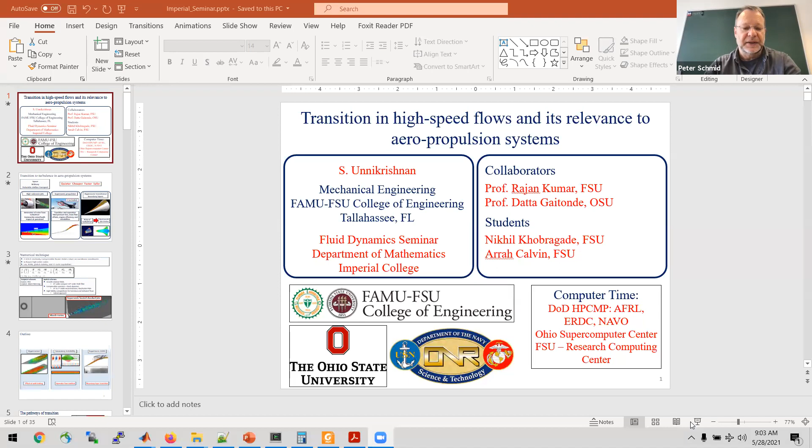I'm just trying to share the screen here. All right. And presentation mode. Yep, perfect. Okay.

Thank you, Professor Schmid, for that intro. I'm Unni, I'm a faculty at FSU. Today's talk will be on transition in high-speed flows and its relevance to aero-propulsion systems.

Let me start by first thanking you guys for the invitation, and it's a great pleasure to share some of our recent research with this community. I would like to acknowledge our collaborators on these projects: Professor Rajan Kumar here at Florida State University, Professor Datta Gaitonde at Ohio State, and our students who have contributed to this work, Nikhil and Arrah at FSU. We'd also like to thank continuing support from the Office of Naval Research. They have been supporting this research at these institutions, and we of course need lots and lots of computing time, which has been provided by various agencies within the DoD, the Ohio Supercomputer Center, and the FSU Research Computing Center.

With that, let's talk about some motivational charts here. Why do we need to understand transition to turbulence, especially in high-speed flows? Because whether you think about space applications, military, or futuristic civilian transport, high-speed air travel is dependent on reliable prediction of skin friction, heat transfer rates, and reliable predictions of boundary layer performance within internal flow paths. There are a lot of applications where transition to turbulence comes into the picture in such systems.

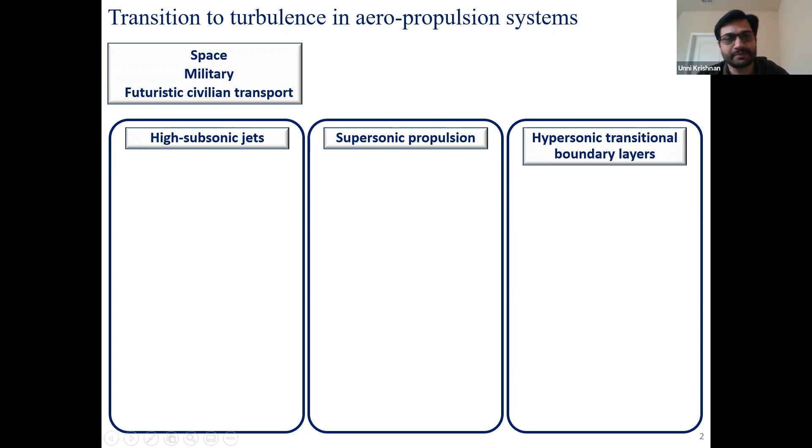I have listed three specific examples here because we have been working in these areas over the past few years. The first one is high-speed subsonic jets. Civilian aircraft as well as military aircraft can have high subsonic or even supersonic exit jets that throw out a lot of kinetic energy into the ambient. So all this shear layer harbors a lot of instabilities, and the turbulence generated from it can result in aeroacoustic production of noise, which has very damaging effects on personnel as well as environment. We need to understand, from a first principles approach, how these turbulent eddies or instabilities generate the perceived sound in such turbulent flows, in order to control them eventually.

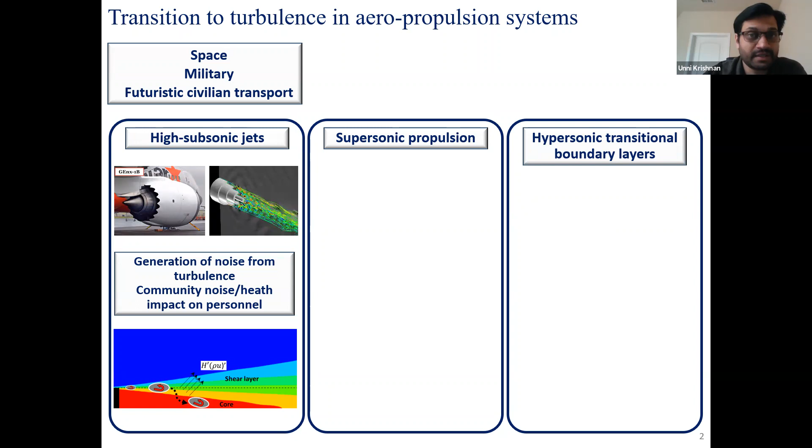The second application I have noted here is the inlet of a supersonic aircraft. Here, issues include things like separation, total pressure loss, mass flow deficits, and its impact on engine efficiency and shock train instability. For example, if you have excessive oscillations in the compression system, you could have unstart, which can damage the aircraft. So again, we need to have a very thorough understanding of how the boundary layer develops on these compression systems or inlet systems for reliable designs.

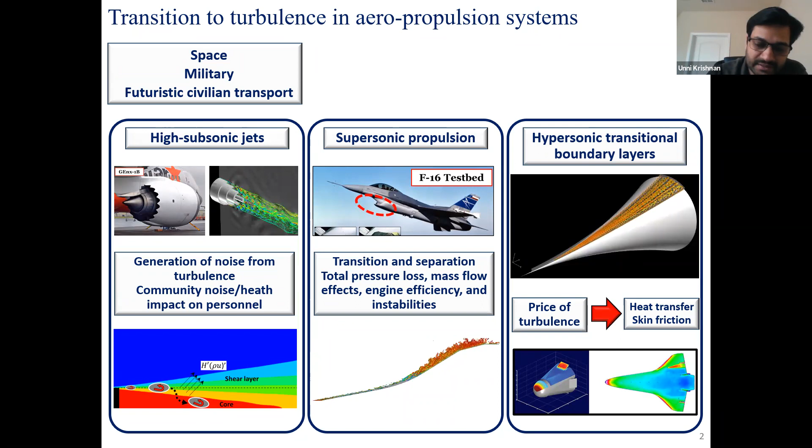The final application is hypersonics. The key here is sustained hypersonic flight. If we are to design sustained flight vehicles traveling at Mach 6, for example, we need to have control over where transition may occur, or if it even occurs, and whether we can control it or push its location downstream over the aerodynamic surfaces, in order to control the price we pay for enhanced wall loading. All these applications can be summarized in a few words: we need to make our high-speed systems quieter, cheaper, faster, and safer. That is why we do what we do.

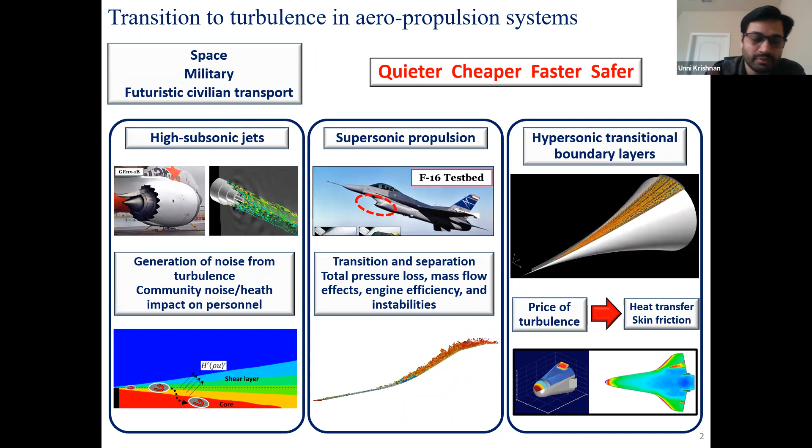With that, let's go into the technical component of the talk. Before I present some results, a brief introduction on the tools we are using. Ours is primarily a computational analysis group where we rely on high fidelity simulations to probe these flow systems. Typically, we use two-dimensional or three-dimensional simulations of unsteady compressible Navier-Stokes equations. These solvers implement the strong conservation form on curvilinear coordinates so that we can handle complex geometries. The in-house code has high order capabilities and variants like LES, RANS, stability tools, and the FT suite, which is essentially a specific class of modal decompositions that can handle compressible flows.

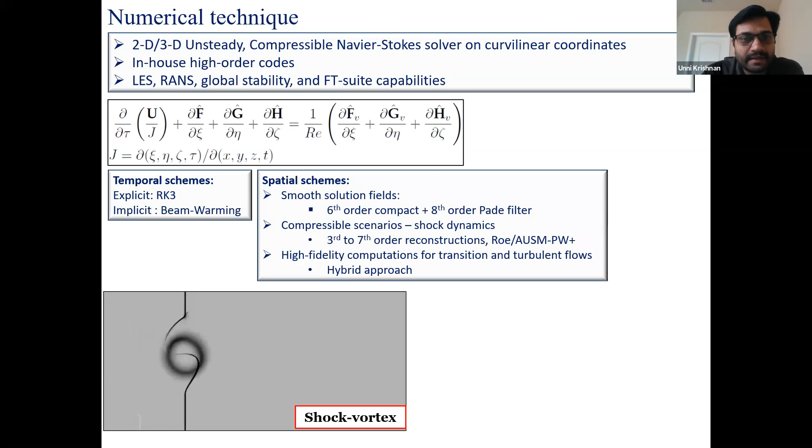In such scenarios, we can use Riemann solvers or a hybrid approach which combines both these. So these are some basic information on the tools that are going to be used in this analysis.

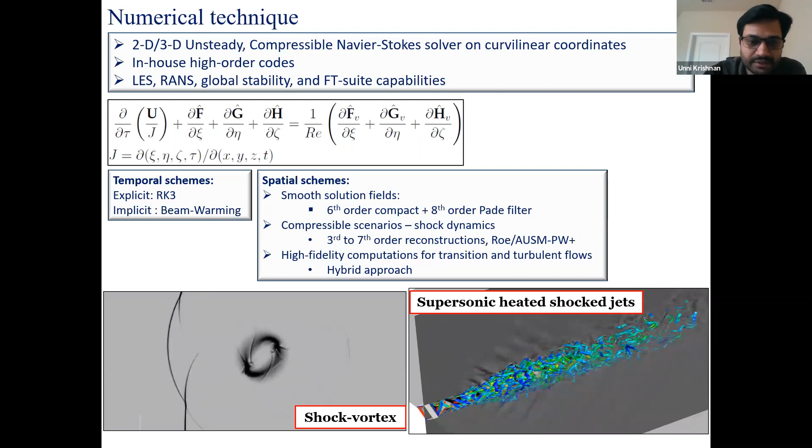Going ahead, as we discussed in the abstract, we have three components in today's seminar. We'll first start with hypersonics, and what we are going to address there is the effect of wall thermal conditions on a very key instability mode in hypersonic boundary layers. As you cool the wall, for example, the qualitative nature of instability response in the boundary layer changes, and that's what we are going to quantify today. And we will look at some nonlinear stages in that instability evolution.

The second part transitions into a talk about an operator-free method, which can be used to study secondary instabilities in such non-linearly distorted flow fields. This is a matrix-free or operator-free method that can be easily implemented in existing Navier-Stokes solvers, and we will look at certain secondary instability characteristics of Mach mode instability.

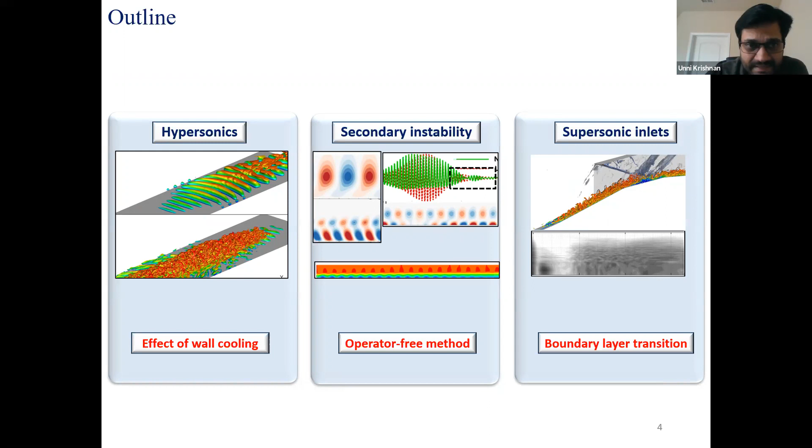Finally, we will conclude with an application of the stability tools and transition analysis in an aero-propulsion problem. Specifically, we will look at a supersonic inlet and see how we can get more physics into this complex flow field by adopting a very fundamental stability-based analysis. So with that, let's go into the first section.

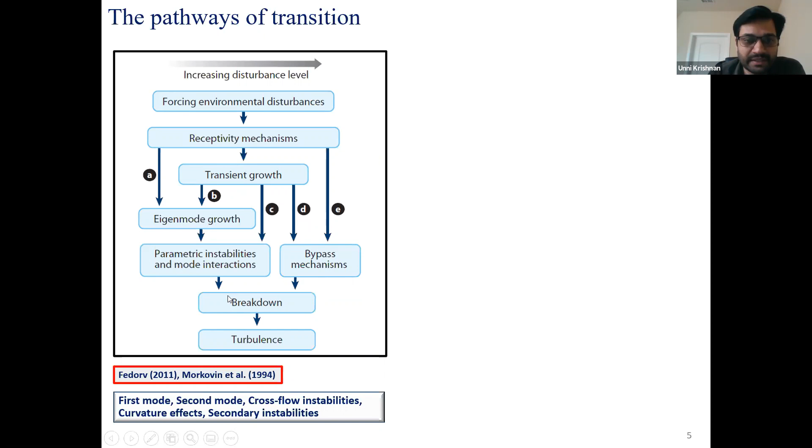If you look at the literature, there's this famous diagram from Morkovin. Transition in high-speed boundary layers, for example, can progress through various different pathways depending on free stream conditions. It starts with receptivity, and it could follow the linear eigenmode growth or a non-modal or algebraic growth, eventually reaching nonlinear saturation and breakdown. Sometimes if the free stream conditions are high intensity, you could also get this bypass mechanism, which circumvents all this modal growth. At the end of the day, you get some sort of a saturated flow, and then it breaks down into turbulence. In order to focus on hypersonic boundary layers, that's the topic we are going to discuss today.

Now the problem is, even if the boundary layer survives this linear growth, if you look at the growth rates of the second curve, it's an order of magnitude higher than what it experienced in the first curve. So the second curve is literally called the second mode, or the Mack mode. Mack mode has a higher growth rate, and hence, of course, it has a higher chance to reach that critical amplitude to trip the boundary layer.

Theoretical analysis have shown that you can have many such curves which appear in the downstream direction in high-speed boundary layers, which correspond to inviscid instabilities of the mean flow. So this is the mode we are going to focus on today, the second mode, or the so-called Mack mode.

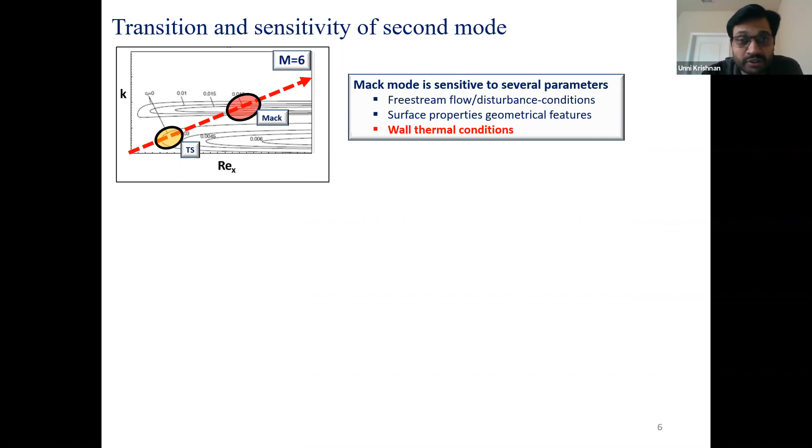When I say wall thermal conditions, what I mean is Mack mode in the boundary layer can evolve differently depending on whether it is an adiabatic wall, a hot wall, or a cold wall. And cold wall is going to be, again, the focus of the discussion here.

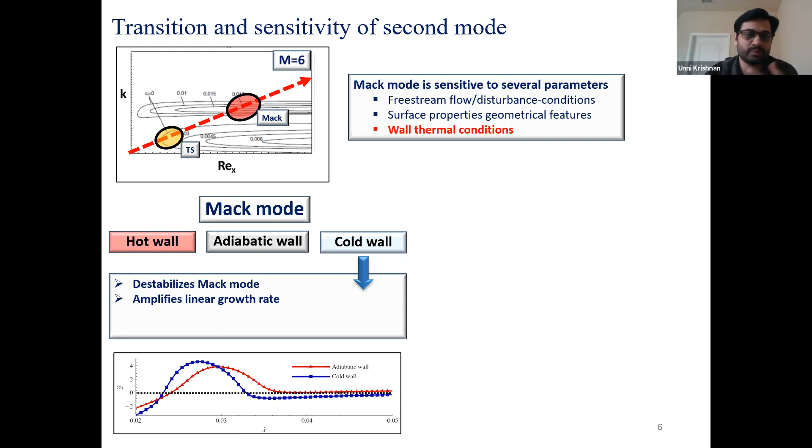The first basic observation is linear stability has shown that if you cool the wall, the Mack mode destabilizes, whereas the first mode shows a reduction in its growth rate. What I'm showing here is the complex part of the frequency omega i, that's the growth rate, from a simple 1D LST or linear stability analysis. The red curve is an adiabatic wall and the blue one is a cold wall. As you can see, the growth rates have amplified when you cool the wall and the wavelengths have decreased, so the length scales shrink and amplification rate increases. That's what typically happens when you cool the wall.

So why do we even need to study cold wall trends in hypersonic boundary layers? This is because in ground tests, where high enthalpy tunnels are used for short duration runs, the thermal inertia of the body may not actually allow it to heat up or warm up to that recovery or adiabatic temperature, which is more likely the scenario in actual flight. So it's important to reconcile the differences between such cold wall conditions versus an in-flight condition, in order to draw reliable, high fidelity insights from our elaborate experiments and computations. That's why such cold wall simulations are very important and practical for hypersonic studies.

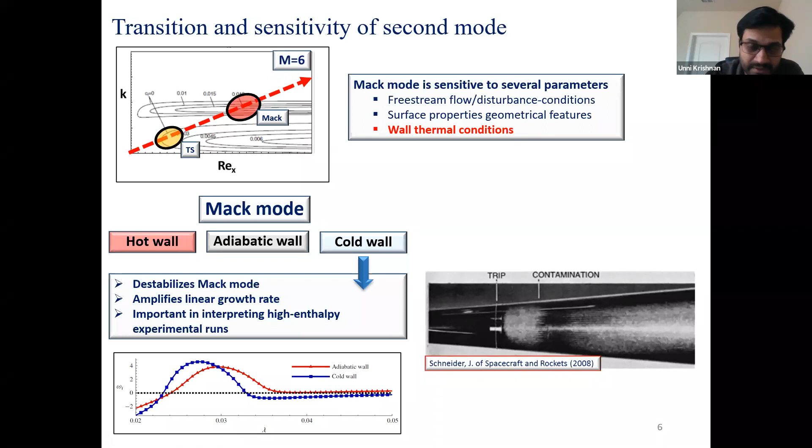1D LST is basically a one-dimensional analysis. It will tell us what qualitative changes we can expect in the instability mode, so this is the first level of probing we use to categorize what instabilities can occur in a boundary layer as we cool it. The next phase includes two-dimensional DNS, where we probe into the spatial structure of these instabilities in greater detail. Finally, we do 3D DNS for select cases because it's expensive, but it gives us insights into possible transition, nonlinear scenarios, and three-dimensional effects that are more commonly seen in realistic experiments or flight simulations where you have wave packet forcing in the boundary layer. So these are the different tools we are going to use for our study.

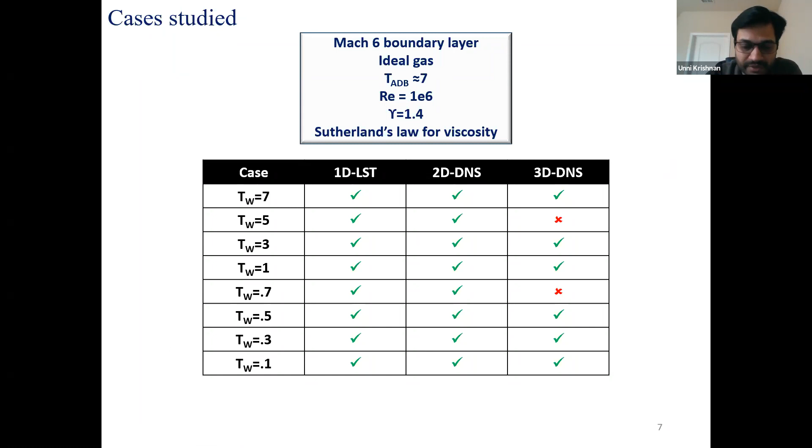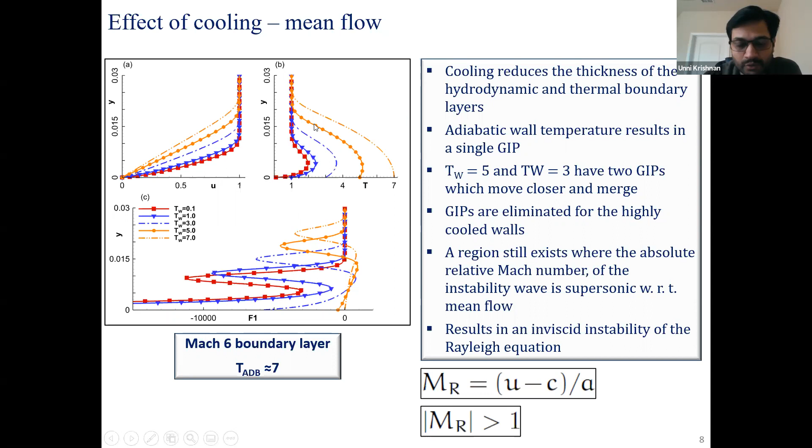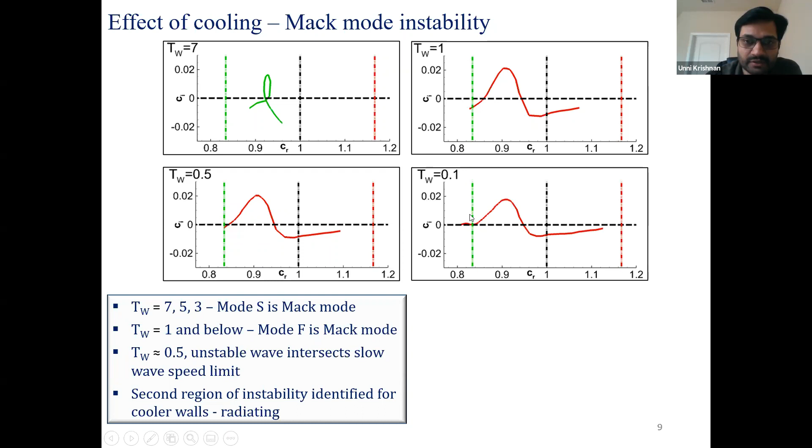And if you closely look at the eigenmode which emerges from that U minus A limit, there is a second zone of instability here. In literature, this is known as a supersonic mode because it is traveling at a phase speed less than the slow acoustic wave, that's less than U minus A.

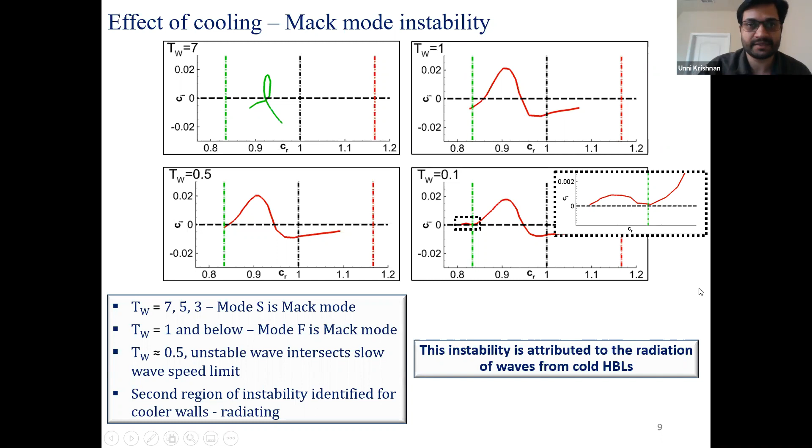And when you have a near stable or an unstable wave at very low phase speeds like this, it leads to radiation from the boundary layer. Physically, what happens is that if you just keep transmitting waves to the boundary layer and keep cooling the surface, at some threshold you are going to see emissions from, or radiation coming out of, the boundary layer because of this wave speed limit. So that is interesting physics we are going to look at here.

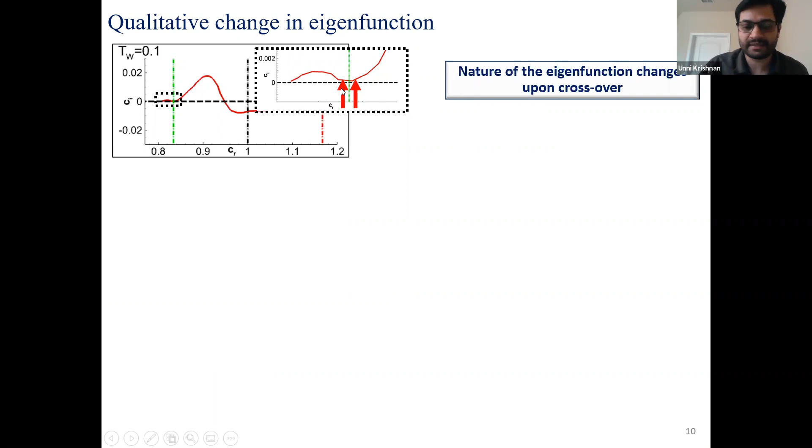So of course, the wave speed limit is also associated with a qualitative change in the eigenfunction itself. What I'm going to show here is how that eigenfunction changes, this is all from simple 1D LST, prior to that crossover and immediately after that crossover. So this shows the vorticity and acoustic component in the instability just before it intersects that wave limit. It's as expected, you have a very nice compact wall normal support to that instability wave.

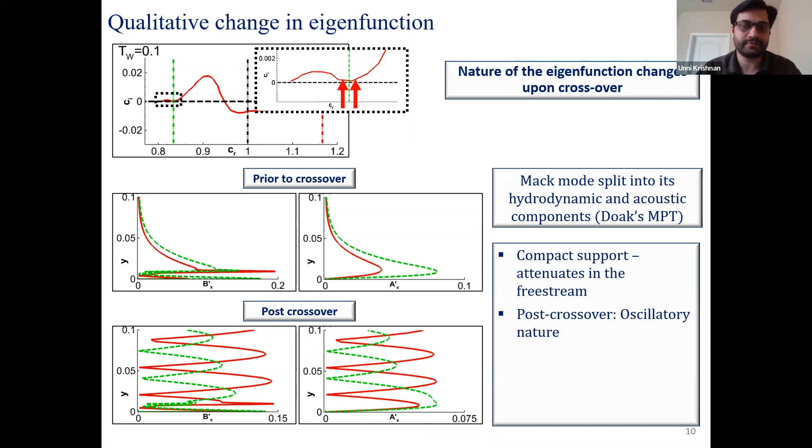But the moment it crosses over into the slower wave phase speed limits, it suddenly changes its character. What comes out of that limit is a highly oscillatory function. That means it's no longer compact, and it's going to throw out energy from the boundary layer into the free stream. That is some nice observation we have using simple 1D LST.

And an important observation here is it is not just sound waves that come out of the eigenfunction. It's actually even throwing out vorticity into the free stream. So it is radiating out acoustic energy and vortical energy into the free stream from the hypersonic boundary layer.

People who do research in hypersonic transition, the first question they ask is, well, we have a mechanism that naturally throws out energy from the boundary layer, can we use it to mitigate transition? So the question is, if we can say that cooling the wall causes the boundary layer to throw out energy, can we use it to control transition? Well, it's an option worth pursuing, right?

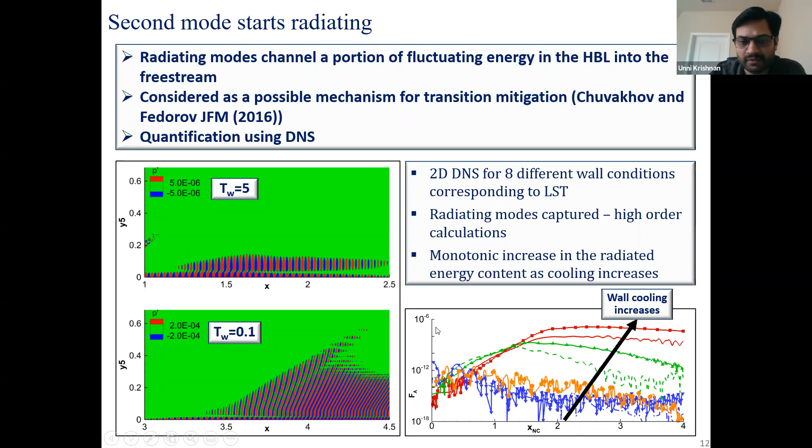So the first step is to quantify that energy, what's coming out of the boundary layer as we cool it. This is basically an energy flux integrated at a given wall normal distance in the flow, in the domain. Outside the boundary layer, you can see that as we cool the wall, these are different wall temperatures, it monotonically increases. There is around an 8th order of magnitude increase in the energy flux coming out of the boundary layer as we cool the wall.

So now the question is, what does it imply for wall pressure fluctuations? If it is really helpful, it should probably attenuate wall pressure perturbations, right?

When we look at the wall pressure perturbations, unfortunately we cannot recreate an inverse trend, because as we cool the wall, the competing mechanisms are second mode destabilization and second mode radiation. The radiation is not sufficient to throw out enough energy from the boundary layer to attenuate that instability. So this is the RMS for different wall temperatures.

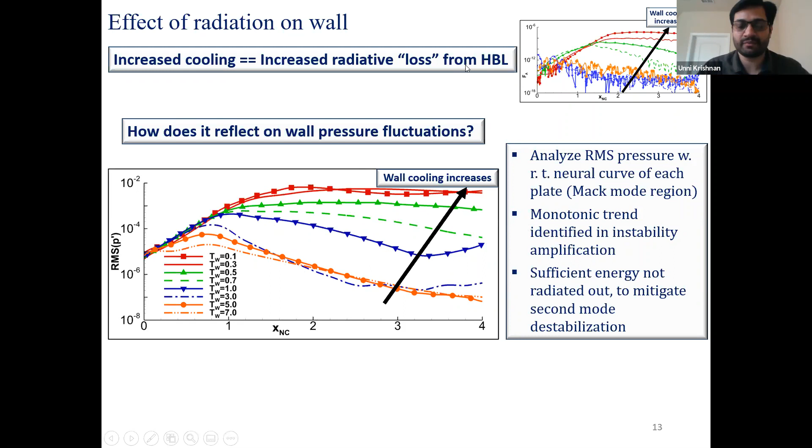So it's not very promising, at least from these 2D simulations. Now what we are going to do is a more realistic 3-dimensional DNS.

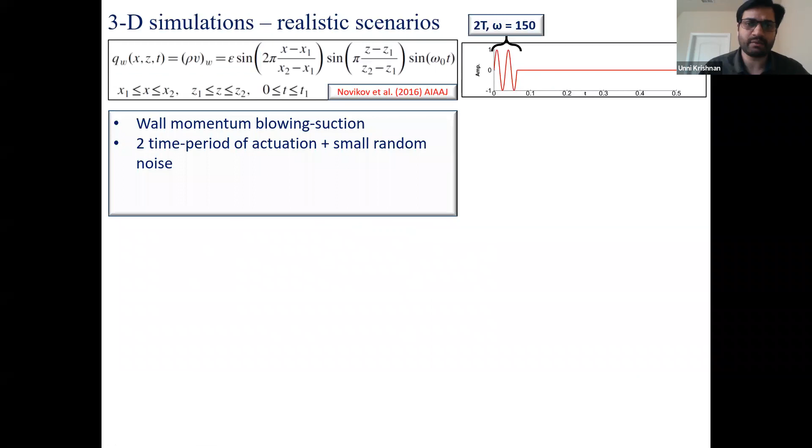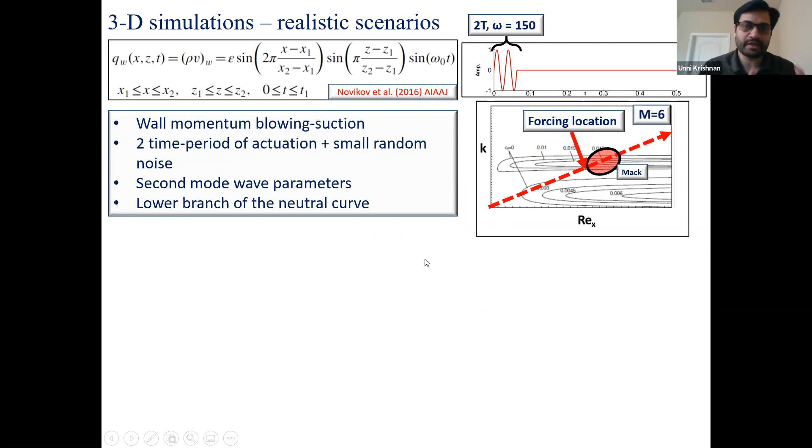Here, what I'm going to show is first we design a wave packet forcing, centered around the most amplified second mode instability depending on our simulation domain. So you put in the wave parameters like frequencies and wave numbers that really capture that wave which transits through that neutral curve, and we compute its evolution through the hypersonic boundary layer.

So it's not helpful, at least in these simulations. We cannot depend on that radiation mechanism as a transition control technique, at least under the given circumstances. So now, well, we couldn't control it, but at least can we quantify what is happening under cold wall scenarios.

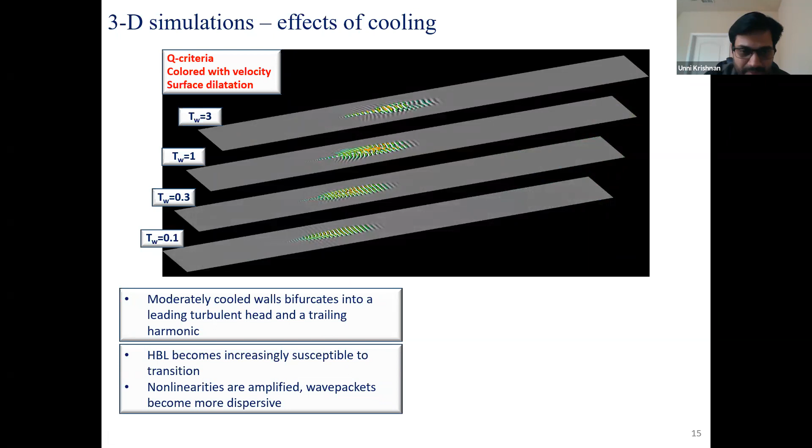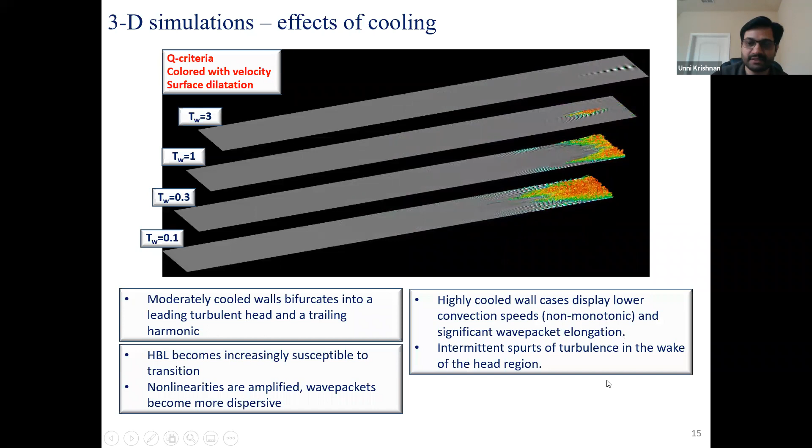But as we decrease the wall temperature, the boundary layer becomes more susceptible to transition. Non-linearity is amplified, the wave packet becomes more dispersed and stretched out, and you get this extremely turbulent spot by the end of the simulation. These are intermittent spurts of turbulence that happen in the wake of the head region.

So there are a lot of qualitative changes that happen in the wave packet propagation depending on the wall thermal conditions. And we need to keep in mind these qualitative differences when we interpolate our low speed experiments or computations and try to make predictions for a real life flight scenario.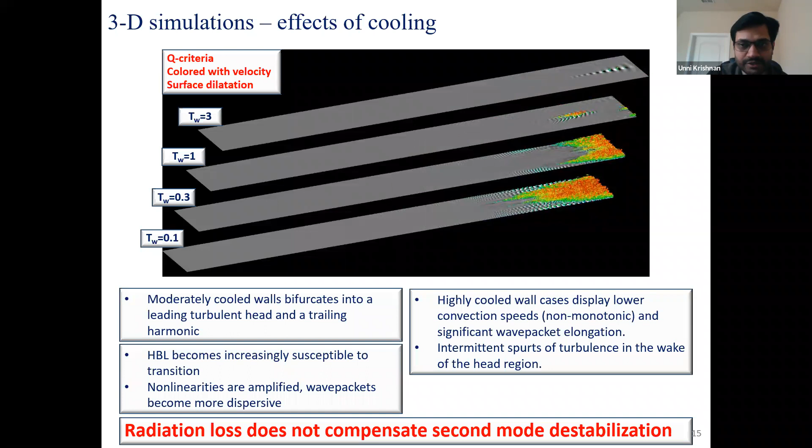So for a designer, the question is, what impact do I have on wall loading characteristics, right? That's what an aerodynamicist should be interested in naturally. So for that, we are going to take a closer look at the turbulent spot structure itself.

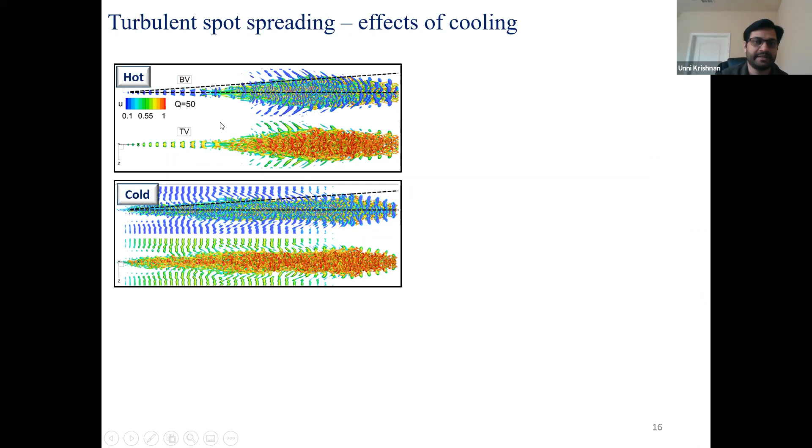This is a top view of the hot and cold wall turbulent spots generated during the simulation. Of course there are obvious differences between these. For example, in the hotter wall we have much broader spots, as opposed to slender and finer scale structures in the cold wall case.

If you look at the spreading angle, it's not very sensitive to wall thermal conditions. That's because we found the spreading angle to be dictated by the boundary layer edge condition, and it matches what experimentalists have found. Around 4 degrees is what comes out for a Mach 6 boundary layer.

Another interesting thing is, can we explain the spreading mechanism in the lateral direction? Because it's also important to quantify how these spots spread in the transverse direction—this is the streamwise, and this is the lateral or spanwise dimension. For that, there was an earlier study by Redford et al. who looked at the so-called lateral jet mechanism.

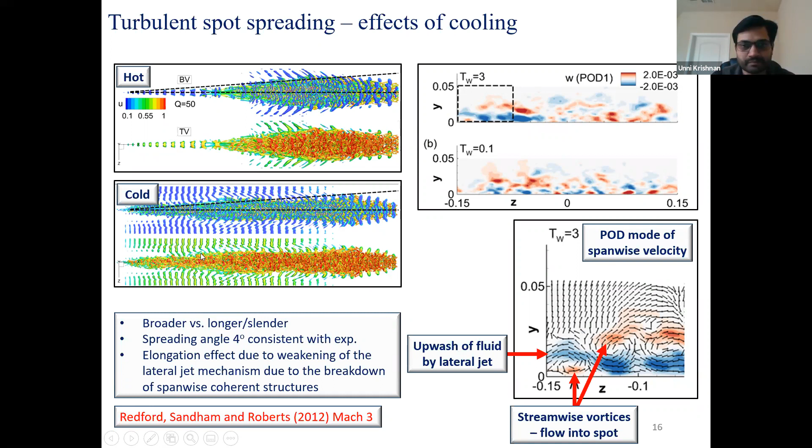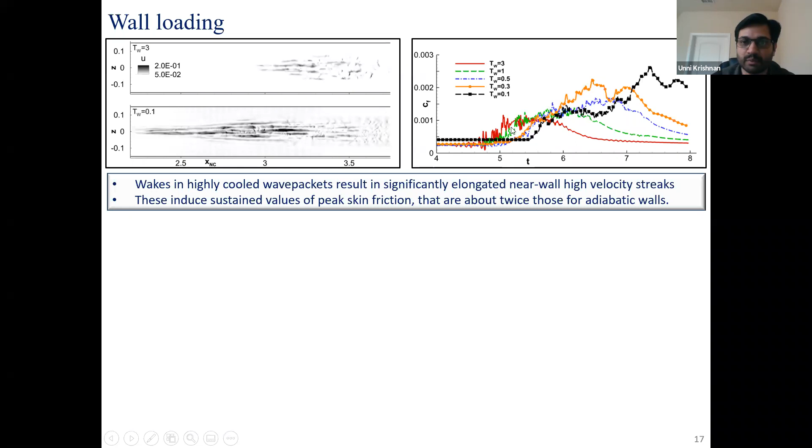But if you look at the cooler walls, you have much sustained levels of higher skin friction being induced on the surface because of this structure. And it's almost twice that of the T wall 3 case for a much cooler wall. So it's a very high impact on wall loading.

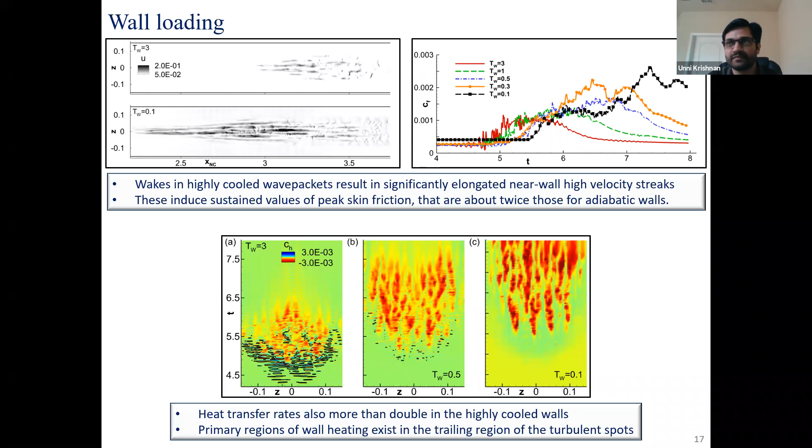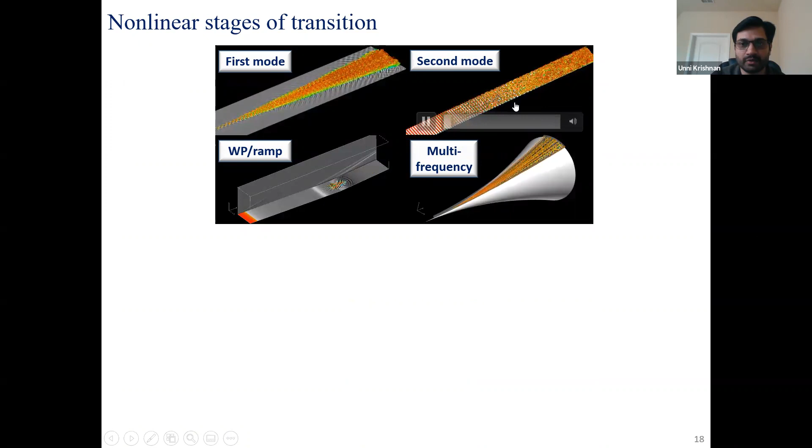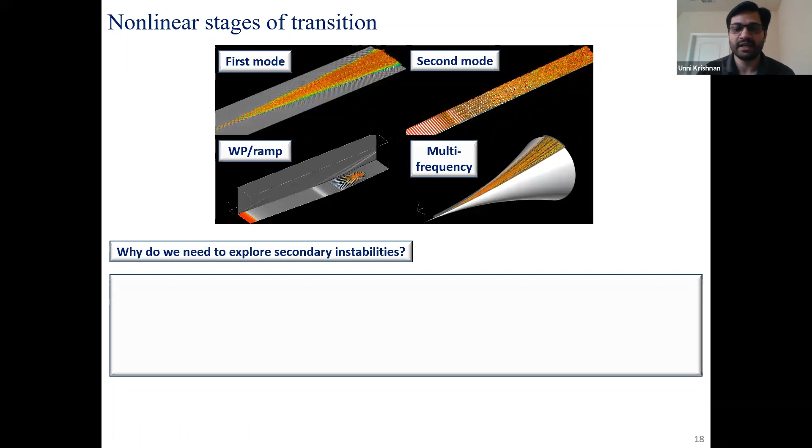We have the peak wall loading, as you know, after the primary wave saturates, and nonlinearities tend to dominate the flow, causing intermodal interactions. So the question is, in order to have very quick, computationally inexpensive predictions for those later stages of transition, we really need to mature our linear stability tools to handle those flow fields.

And that's why secondary instability study is quite important from a practical view. Because when we mature our primary stability tools to accommodate for that nonlinearly distorted flow, we can have quick estimates of where transition could happen for a given geometry, and what spectrum is involved - for example, what wave number frequency combinations of modes drive transition in an actual scenario.

And even if you think about a globally unstable flow like cavities or wakes or even large SBLI bubbles, after that critical Reynolds number where you have this oscillatory state, primary eigenfunctions may not necessarily capture what scales are dominant in that flow. For that, we really need to get a sort of secondary instability modes in these complex three-dimensional flows. So that's why we need a generalized framework to perform secondary instability analysis in three-dimensional flows.

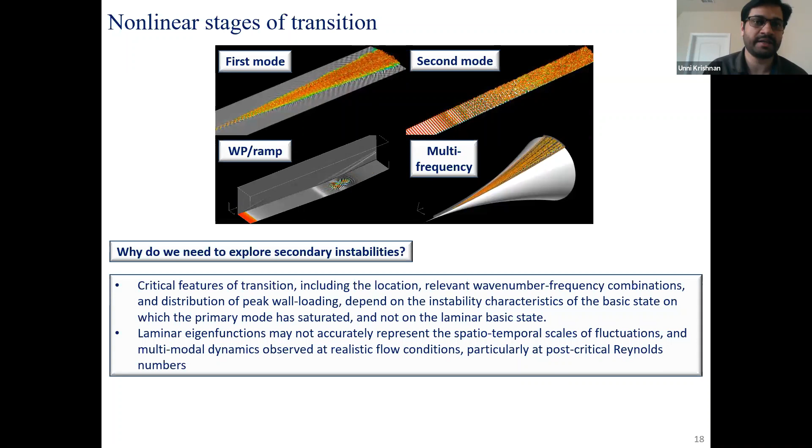In this talk, we will look at a generalized tool to do secondary instability, specifically applied for the second mode instability in hypersonic boundary layers.

Before we talk about secondary instability, let's first characterize the primary instability of the wave we are discussing. This is a Mach 6 flat plate boundary layer, in which we have an actuation that puts in a monochromatic wave, and naturally it undergoes linear amplification in that second neutral curve.

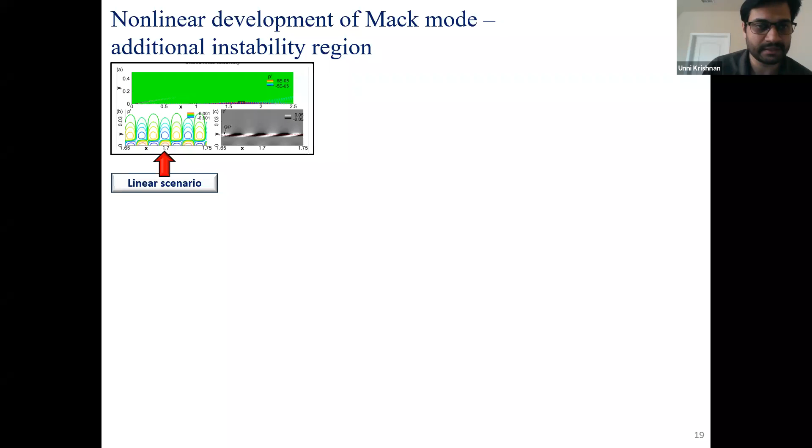If you look closely at that zone of amplification, you see this classic dual lobe structure to the second mode instability. And if you look at the density perturbations, this is very similar to what experimentalists show in shadowgraphs, for example. You have this rope-shaped pattern that emerges when second mode is appearing in high-speed boundary layers under these conditions. Now let's see what happens in the nonlinear scenario.

When nonlinearities pick up in the flow, the structure slightly changes. You no longer have a symmetric distribution - that's the first observation. You have this distorted wave pattern and an N-wave structure to it, because the primary is being superimposed with its harmonic, causing this asymmetric pattern in the combined response.

If you look at the density perturbations, you have an asymmetric, highly interwoven type of rope-shaped structure in this nonlinear wave. So there are some nuances in how the shadowgraph looks, whether it's a linear wave versus a nonlinear wave. So the question is, what is different in these responses?

Let's look at the wall pressure perturbations. The red one shows the linear P-prime on the wall, normalized by its respective peak amplitude. The green one is the nonlinear scenario. You can see the red curve is quite symmetric, and the green one is slightly shifted because the mean flow is no longer a laminar function.

It has nonlinear distortion, so the mean flow itself is changing, and of course it is asymmetric. But the more interesting feature we will explore here is this trailing part. As the primary envelope closes, you have a second zone of amplification coming in the nonlinear scenario.

If you do a modal decomposition on the nonlinear response, you can cleanly split it into the primary wave at omega naught, which is our forcing frequency, and its superharmonic, and if there are higher ones they show up in the following modes. But the important thing to note is that second zone of amplification is actually driven primarily by the fundamental itself - we have that second zone of support corresponding to that.

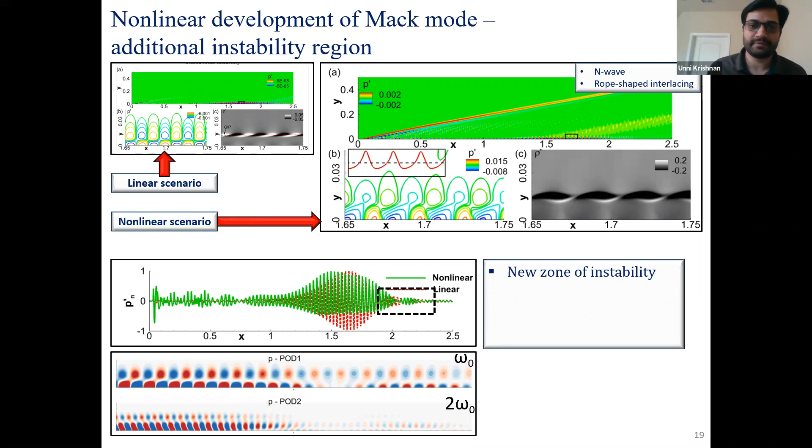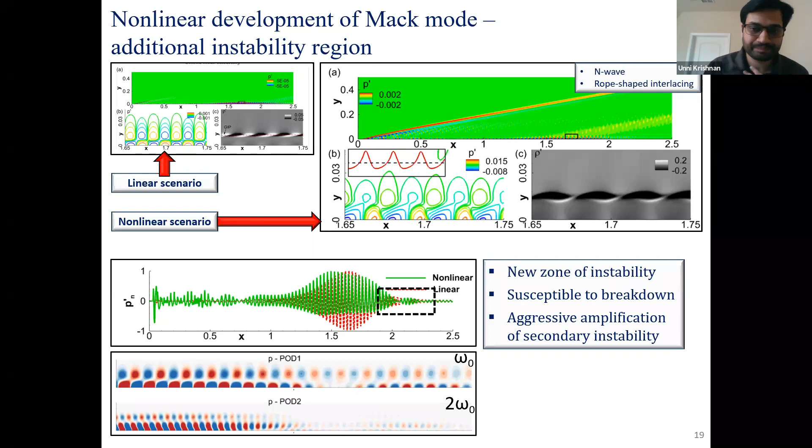Why is that important? Because when we actually did the DNS on this flow, we saw that that trailing part is what really drives transition. That's where non-parallel effects are very strong - you have a lot of oblique modes developing in it. So we really want to know the secondary instability characteristics of that zone in order to quantify transition. That's the motivation to study this problem.

So the question is, how do we study that secondary instability characteristics? We know that our laminar eigenfunctions, the laminar mean basic state - for example this corresponding DNS laminar flow field - is sufficient enough to study our primary instability characteristics.

But when we go to the saturated flow, we need to account for periodic oscillations maybe in space as well as time. That's where people have done a lot of work on Floquet analysis for fluid systems. This shows the spatial distribution in the distorted U, V, pressure and density variables in the hypersonic boundary layer, and these are the respective oscillations in time - it's a spatio-temporally distorted flow.

How do we do the secondary instability or Floquet analysis without depending on the operator itself? That's the key question here.

So let's first define this flow to be a spatio-temporally varying quantity. Q is some general variable of the flow, which varies in space and time. That has a time-invariant function that is just the basic state which stays forever. Now we can also split it into a fluctuating component, which is time dependent, and we explicitly mention that it is a T-periodic function - that is the distorted quantity.

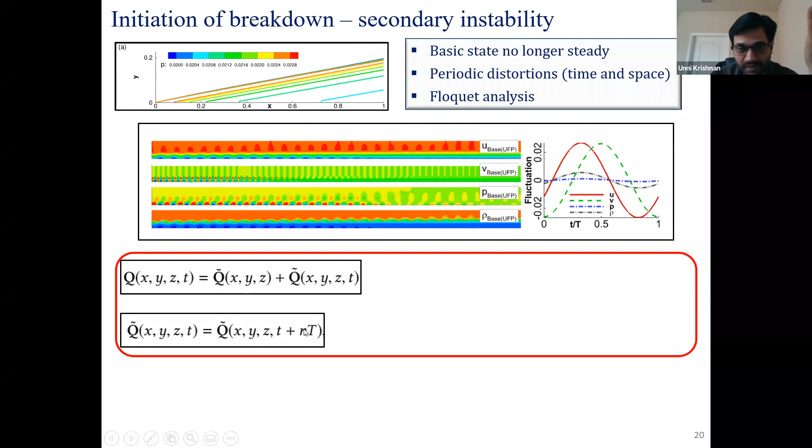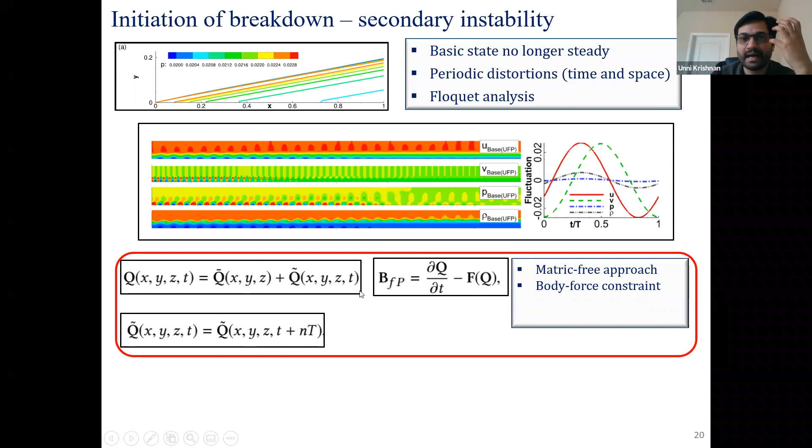Now, if we linearize the governing equations implicitly, how do we do that? By imposing a body force. That body force is defined basically as a time derivative in Navier-Stokes, and that is a spatial operator. So if we extract this body force from the Navier-Stokes solver, we can use it to implicitly linearize it or arrest the basic state at any given condition, and then we can explore the linear tendencies of that flow.

It boils down to this linearized equation where you have the perturbation quantities and the Jacobian. This Jacobian is time invariant or constant if you are talking about this laminar case where it is primary instability, and it is a function of the basic state. It will become unsteady when it is a t-periodic state, or when we are talking about secondary instability.

This is also somewhat similar to the work by Touber and Sandham in 2009, where they did some implicit linearization for SBLI unsteadiness, evaluating linear tendencies in SBLI unsteadiness. So this is the framework we are going to use for secondary instability analysis.

The best part of this approach is it helps us to tweak the existing Navier-Stokes solvers we use on a daily basis for our computations with very minimal modifications and get this very versatile secondary instability tool. The other advantages are it also helps us to transfer all the high order formulations we use in our Navier-Stokes solver to the perturbation analysis too.

And of course, it allows us to leverage the compressible 3D formulation without any limitations on the geometrical complexity of the flow field. Also, if your solver has capabilities to do things like source terms for chemistry or additional equations for vibration non-equilibrium, all these things can be implicitly linearized into this new system. So that's a convenient property that comes along with this tool.

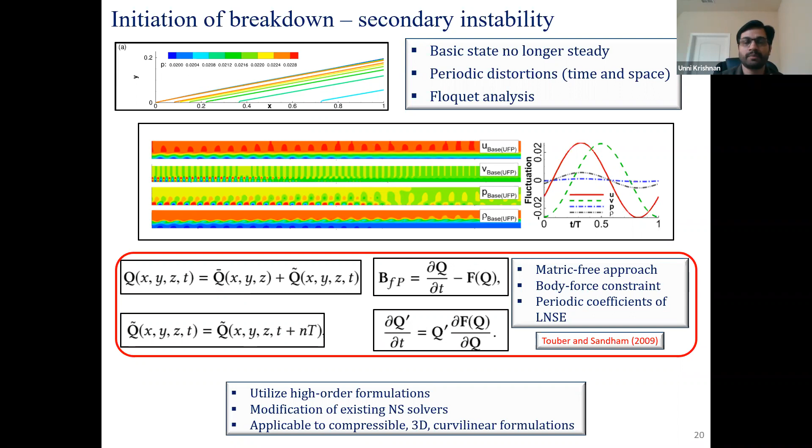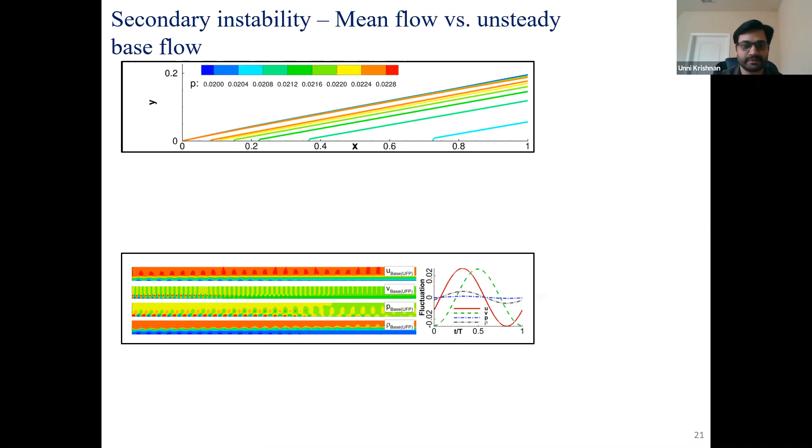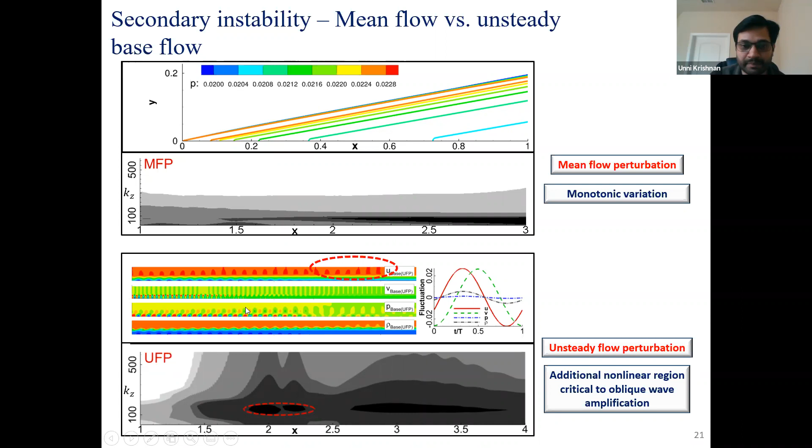And why do we have a patch over there? That's because that is the region which most aggressively amplify oblique modes, and that is the region where the primary envelope ends and that secondary envelope picks up in our distorted mean flow. So in order to really understand how good or bad that UFP prediction was, we really need to do a benchmark simulation.

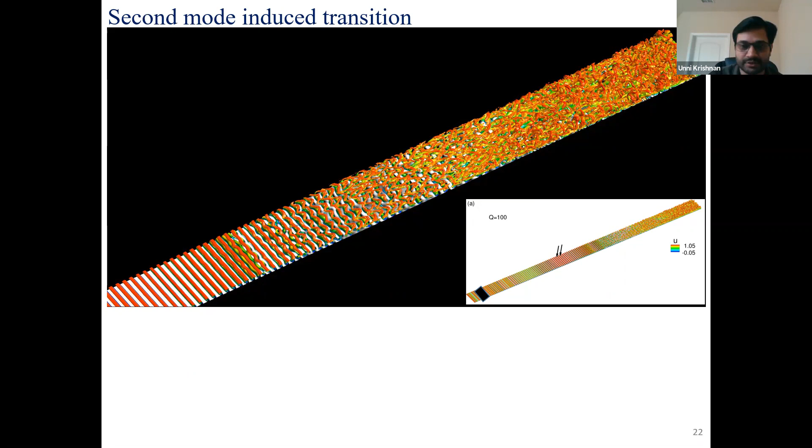Here, we consider DNS as a truth model. This DNS basically uses a blowing suction strip to put in that second mode wave, and it undergoes linear amplification, nonlinear saturation, and eventual tripping into a fully turbulent boundary layer.

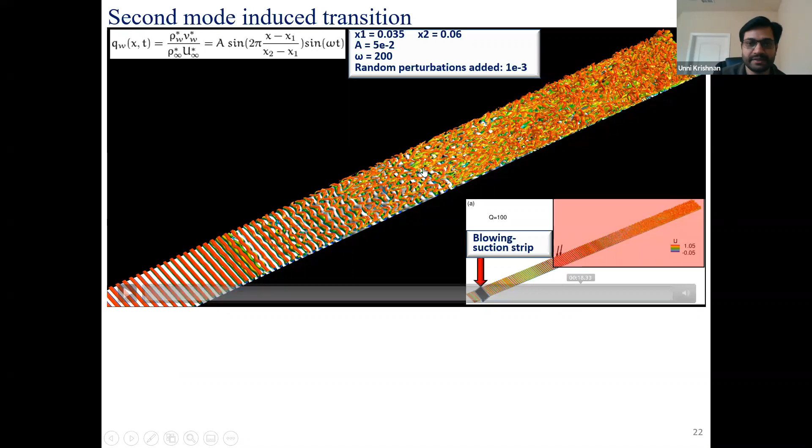If you zoom in onto that region, this movie will show you what's happening. That circled region there corresponds to the second envelope in our wall pressure perturbations. You can see there are, until that location, the second mode is rollers, basically. These are the 2D waves.

But immediately those oblique modes start coming up. They create this lambda vortices, and eventually you get a forest of hairpins, right? That's how turbulence seems to originate in these flat plate configurations.

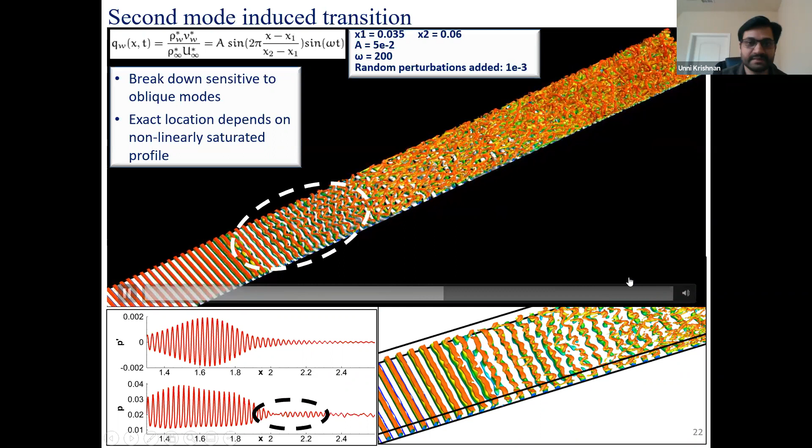And this undergoes what is known as a fundamental resonance mechanism, because these oblique modes are also at that fundamental frequency. So, this is what the DNS tells us is going to happen.

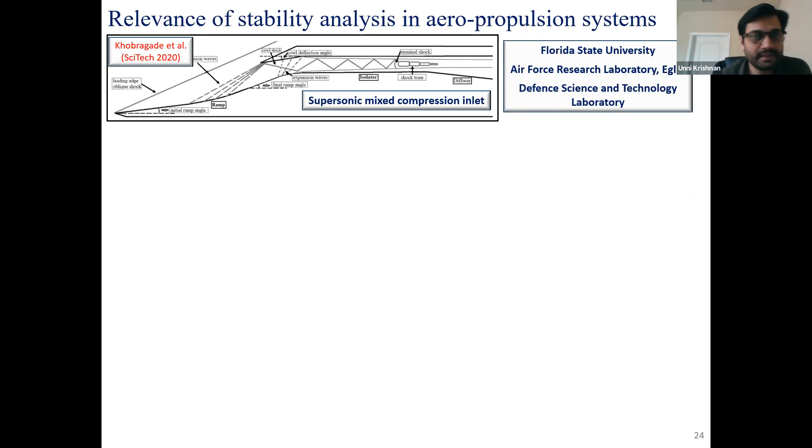How do these transition prediction tools or linear stability tools really help us in applied problems like aero-propulsion? What I'm showing here is something we have been researching at FSU for the last 2 years. This is a so-called mixed compression inlet at Mach 3. Such inlets can be commonly found in high-speed projectiles or high-speed aircraft. This is typically called a chin inlet.

Part of the compression happens outside on the ramp, and part occurs inside the isolator through this oblique shock train. The idea is, how can we design the system to be robust enough so that the shock train is not thrown off the isolator when we have perturbations coming from behind, or uncertainty in unaccounted disturbances from the free stream? Because if this shock train is destabilized, we get unstart phenomena.

This is a collaborative effort between Florida State University, Air Force Research Laboratory at Eglin, which is a couple hours drive from here, and the Defence Science and Technology Laboratory, UK.

At FSU, the computational aspect has 3 focus areas, which will be the discussion items for the rest of the seminar. The first looks at low fidelity CFD like RANS, because it's a very important design tool. The idea is to calibrate some of these models with experimental counterparts.

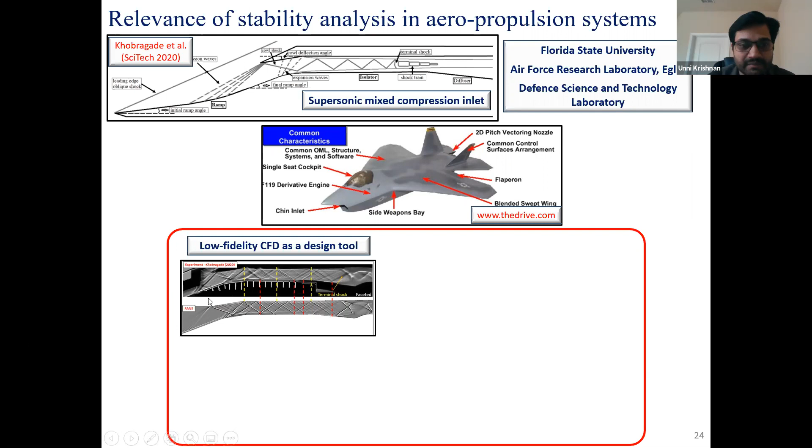We have experiments also going on at FSU here. So the idea is, if we can calibrate our low fidelity CFD models, we can look at design iterations, parametric efficiency parameters like mass flow deficits or total pressure losses, and shock train distribution with slight modifications in geometry. That's a very production-type tool that's quite useful for design iterations.

The second aspect of our analysis in CFD is more fundamental, where we look at component-wise details of this flow and try to understand the dynamics involved in the boundary layer processes going into the inlet, and what's happening within the shock boundary layer interactions.

The third component is, I would say, more high fidelity CFD as a truth model. There we are trying to simulate as much as possible of the whole domain. We might have to go for wall modeled or maybe wall resolved in special cases, but the idea is to get the whole system simulated using high fidelity CFD.

In this talk, I'll be focusing on the fundamental aspect of this analysis, because it matches quite a bit with what we have already covered for transition to turbulence in high-speed flows.

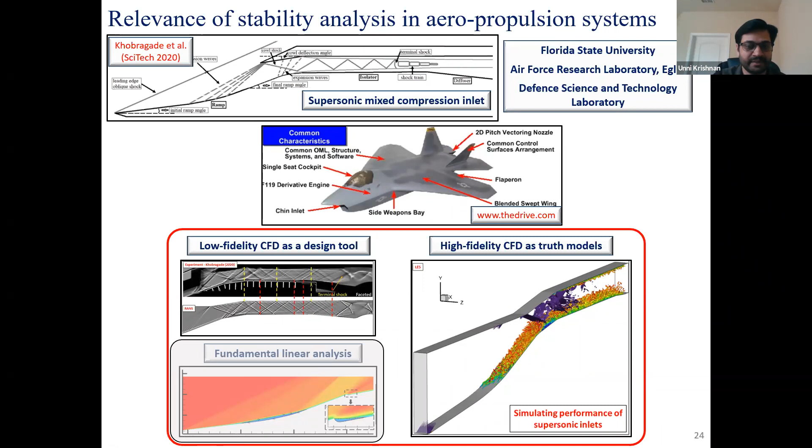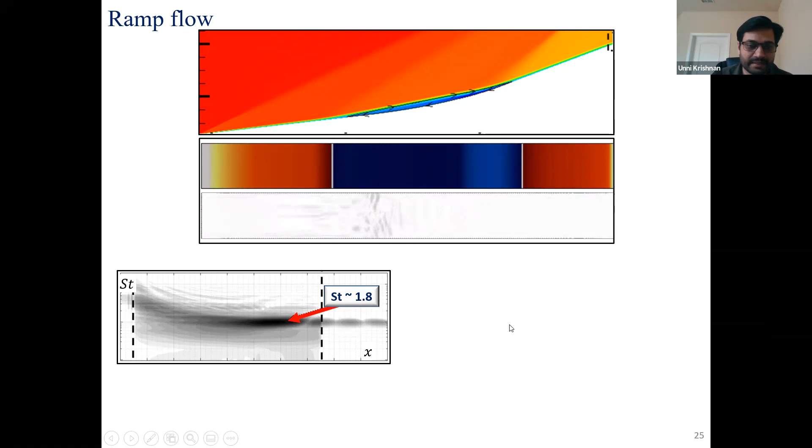If you look at the pressure spectrum, you get this thumb curve sort of region, but it neatly coincides into that narrow spectrum over there at Strouhal number 1.8. It's 1.8 because it's being normalized by the height of the channel. But that band there is really the KH type instabilities supported within the shear layer.

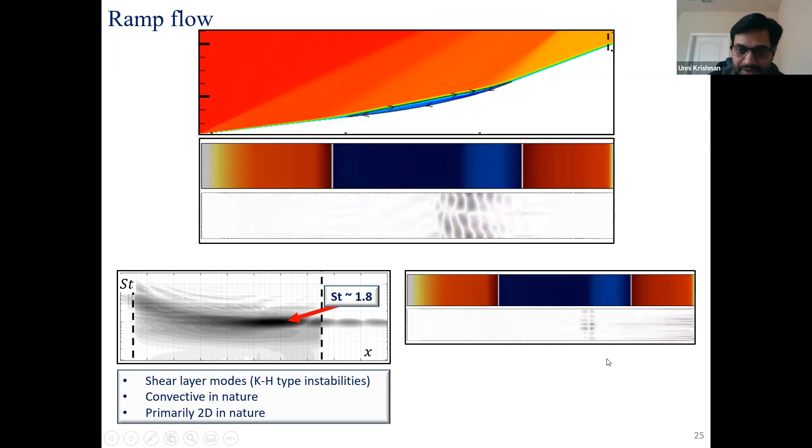It's convective in nature, and it primarily comes out in our two-dimensional analysis. But another interesting aspect of this region is if we keep playing that movie for long enough, all the convective instabilities move out of the domain, and then we get this nice standing wave, which has a very specific span-wise wave number, as you can see in this movie. And it's also stationary—you don't see it oscillating. It just stays there and grows monotonically with a positive growth rate.

So we looked at the Görtler number for this curved wall, and it's well above the threshold for the instability criteria. So this could very well be Görtler instability vortices. And they are streamwise vortices, and they have an absolute instability character to it, unlike those KH structures.

So the idea is, how do we extract these modes and classify them as stability modes? Because that's what we are looking for, to explain fundamental flow phenomena by extracting the building blocks of the dynamics. So for that, remember we have this UFP tool. It is implicitly linearized. If we assume our basic state is invariant in time, it reverts to the primary instability analysis, and it gives us a linearized perturbation.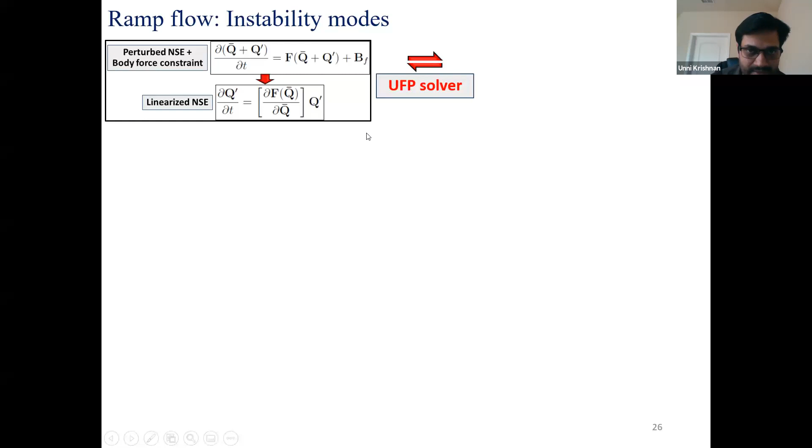All we have to do is pass it through a Krylov subspace iteration like Arnoldi. So you get these orthonormalized subspace vectors, and you get the smaller Hessenberg matrices. And if we can get the Ritz value, as done in the time stepper approach, we estimate the leading eigenmodes of the basic state. This is a well-known time stepper approach, but we are coupling that process to the implicitly linearized Navier-Stokes solver in this scenario.

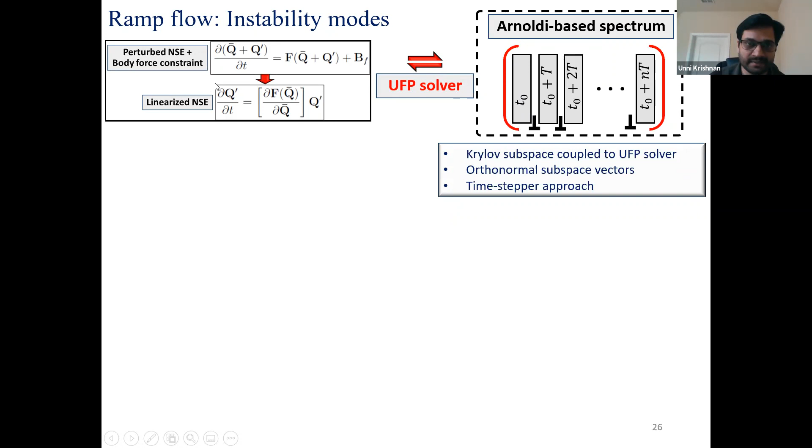So let's see what stability modes we are getting. The two-dimensional analysis picks up a Strouhal number at around 1.8, which corresponds to that thin band I showed in the previous slide. That is our shear layer mode, which originates—we can see the spatial support starts out in the edge of the bubble, and it just convects downstream. This has a negative growth rate, minus 0.1, as expected of a convective instability.

Further analysis, three-dimensional analysis of the flow, picks up this mode, which is Strouhal number 0. That means it's a stationary mode, and has a positive growth rate, meaning it's sort of an absolute instability. It's monotonically growing in time. That is a stationary mode, and it has this straw-like structure on the curved wall—that is a Görtler type vortices. You have this multi-layer or deck-like structure within the bubble. So this patch here, the shaded patch, is the bubble. So it's a 3D mode, and it's going to amplify in the linear sense.

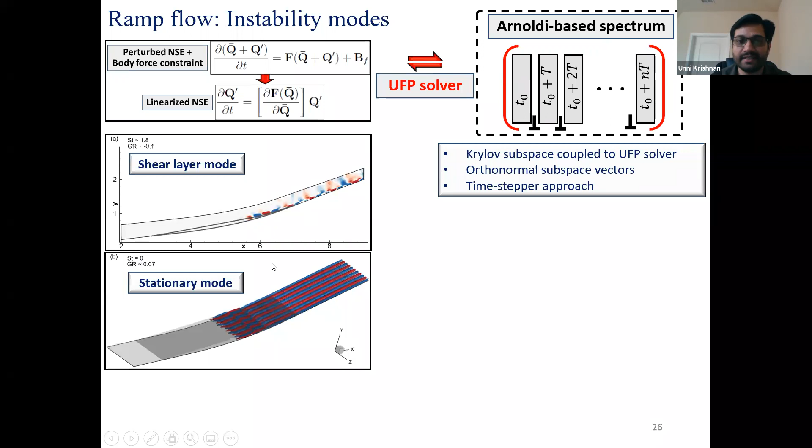So the question is, how does a real life scenario look like? These are linear estimates, right? So for that, we did the LES of the ramp. What we do here is we remove the top part, the cowl, and just simulate the wall using a digital filter that puts in perturbations at a given length scale and frequency scale.

The LES actually captures these roller structures. If you closely look at the bubble, those roller structures are reminiscent of our shear layer modes. It also has streamwise elongated vortices, which closely represent the wave number and wave number distribution in the stationary mode. In the realistic LES scenario, the shear layer modes drive the secondary instabilities on the stationary modes, leading to these hairpin vortices. And the hairpin vortices trip the boundary layer. By the time it reaches the ramp isolator junction, right here, we have a highly turbulized boundary layer.

And there is this nice paper by Li and Malik in 1995. They saw that when we have stationary Görtler type vortices, the so-called even or varicose modes actually look like these hairpins. So they are actual secondary instabilities of this stationary mode. They did this using nonlinear PSE.

Another thing is, how good is our linear estimate of the spectrum, not just eigenfunctions? You can also analyze the spectrum by doing an FFT, for example. This is a linear estimate, that is the LES. You can see the red patch shows how big the bubble is. Of course, it's going to be different in the LES because of all the transition and unsteadiness in it. You can see if you scale these frequencies by the length of the bubble, this has a better match. So that means by using a computationally inexpensive tool, we get a decent estimate of this dynamics.

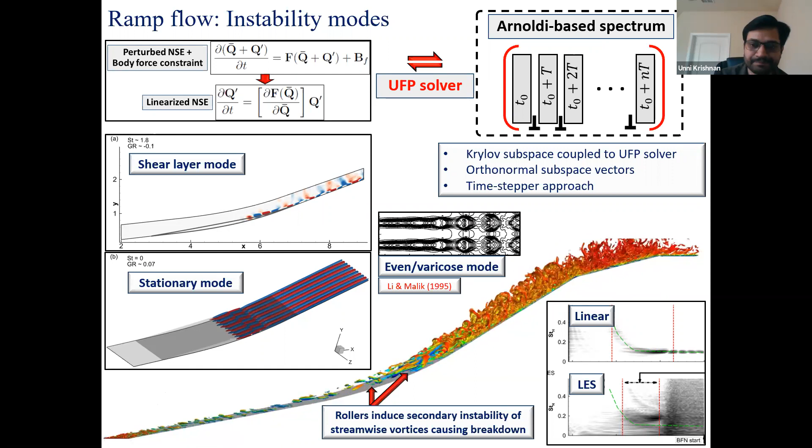Finally, this is my second to last chart. So what we did here is complete some dynamic analysis of external flow. We will look at the internal flow right at the junction there. Why is that junction important?

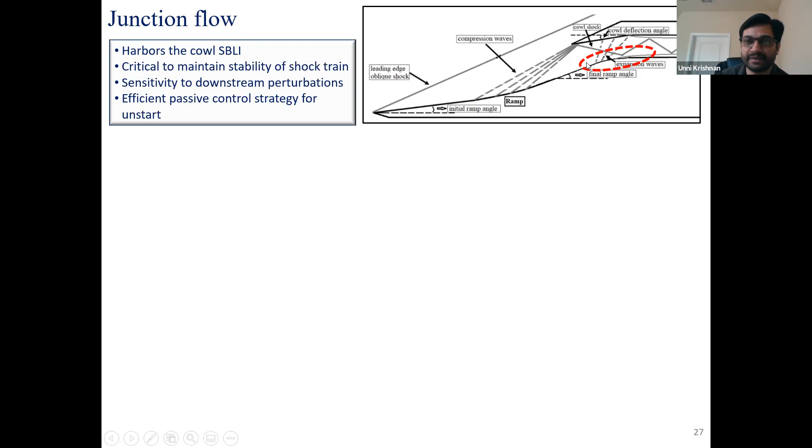This is housing one of the most important SBLIs in this flow, because if this cowl SBLI is sensitive to perturbations, it can destabilize the entire train. So the idea is, can we design this junction using a specific geometry so that we create a more stable basin for that SBLI, acting as a passive control strategy?

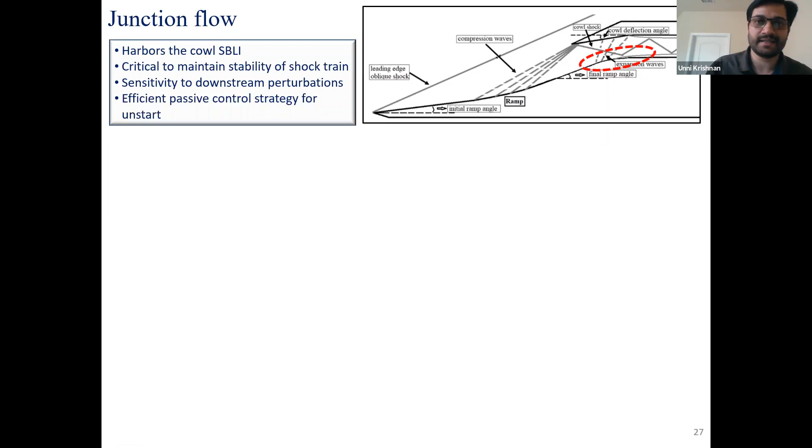So we tested a few design iterations. Two such designs are a step and a notch. This is a step geometry, which is also a candidate geometry for that junction, and this is a notch. The first step here too is linear estimation.

That's basically looking at the linear spectrum of these perturbations. This is streamwise distance, that is frequency. What we see here is there are three bands of frequency distributions in it: one really low frequency component, a medium, and a high.

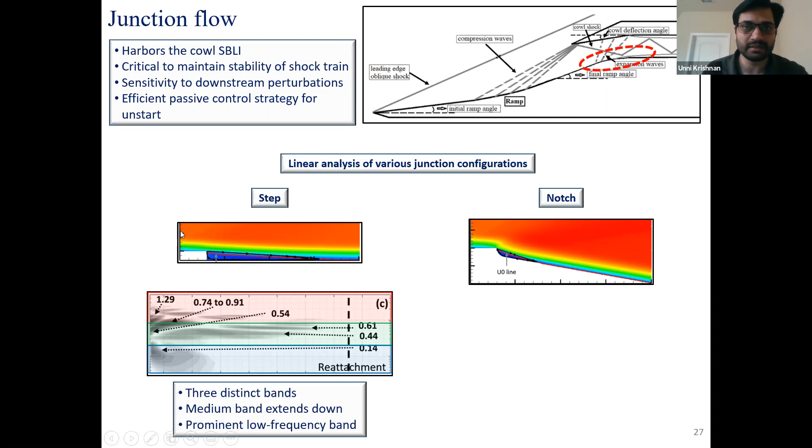The important thing is when we compare the spectra of the notch with the step, we see that the low frequency component is totally avoided in this case because we have a much smaller recirculation bubble. We prevent that from happening in this geometry.

Another observation is the mean flow itself is very robust to the incoming boundary layer thickness. The step flow is highly sensitive to what boundary layer we impose upstream, whereas this seems more robust to it. So the linear analysis tells us that the notch has several desirable features we're looking for in this candidate geometry.

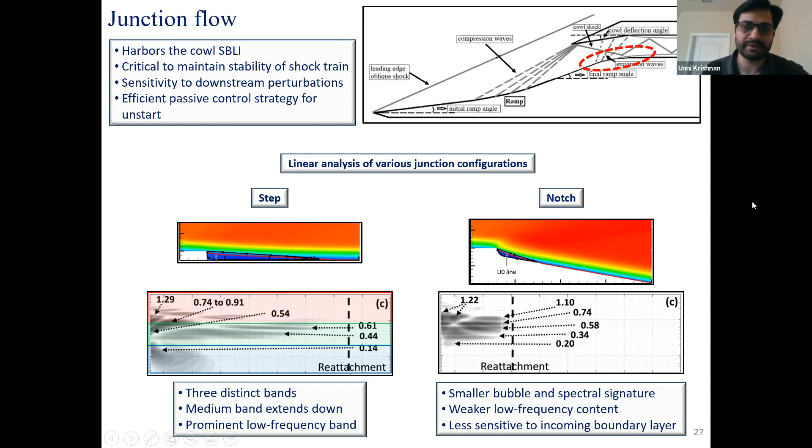Finally, we are currently looking at a realistic scenario of that junction design. This is the LES of the ramp and the cowl, putting the shock reflection at the cowl, you get the first SBLI here. This is a benchmark case where the junction is a straight line, that's a facet.

This is a very rich flow. It has several mechanisms in it: separation, transition, SBLI, acoustic emissions—a whole lot of physics going on simultaneously.

If you look at the mean flow, you can see this impinging shock. You have the reflected shock coming in and then bifurcating into two parts, one emanating where the boundary layer is peeling off, the other component coming out right at the impingement, and then the reattachment zone resulting in compression waves, creating a third shock wave.

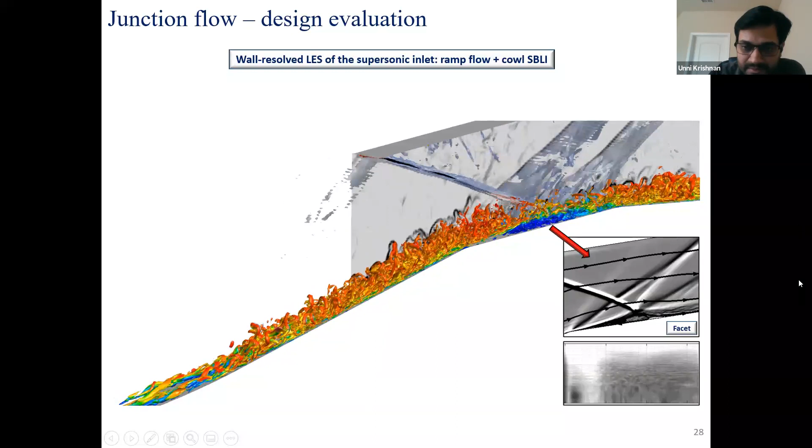If you look at the frequency bands, again you see high, medium, and low frequency, quite well established in two-dimensional SBLI literature, which says low frequency is the bubble oscillation or breathing frequency, also associated with low frequency perturbations in the shock wave. We have the middle band, which really picks up after the interaction because of shear layer instabilities. The highest band corresponds to frequencies present in the boundary layer in a universal sense, even before the interaction begins.

So right now we are analyzing this notch geometry. You can see it's slightly different—you have the notch design there. It seems to get rid of that low frequency peak in a reasonable manner, but we are still exploring the advantages or nuances associated with that particular design feature.

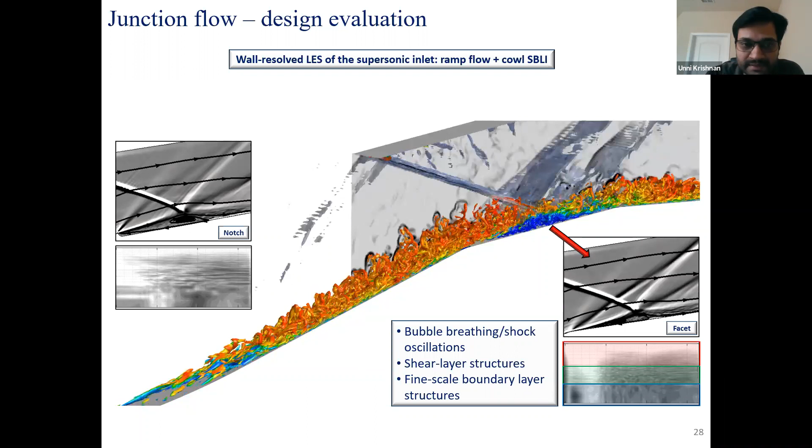So this is how we reconcile linear estimations with more complex LES, and we can leverage our simple tools to give us design suggestions for these complex flow paths encountered in aero-propulsion systems. This is work ongoing. So with that, I would conclude.

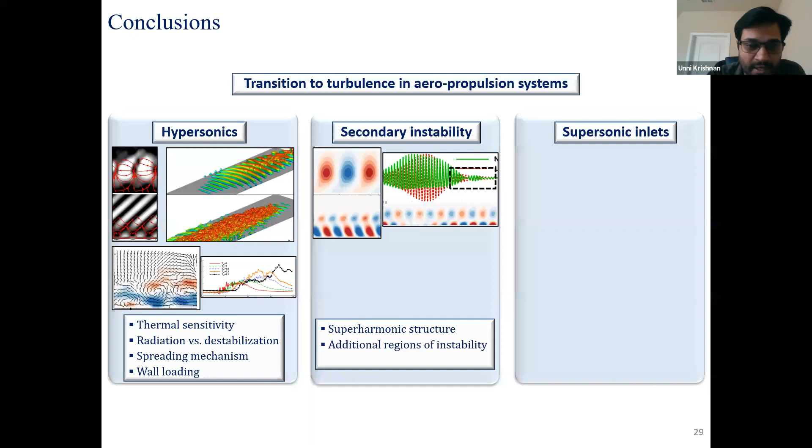We discussed hypersonics, how thermal sensitivity or second mode can result in totally different types of wave packet evolution. Cooling really does not seem to mitigate transition—it's only making it worse. And we talked about superharmonic structures in secondary instability and how we can use a matrix-free technique to extract nonlinear tendencies of the saturated flow that comes in the nonlinear stages of transition.

Finally, we applied those stability tools to a supersonic inlet, which is an aero-propulsion problem, and identified some key features that drive transition on the ramp and unsteadiness associated with the cowl SBLI.